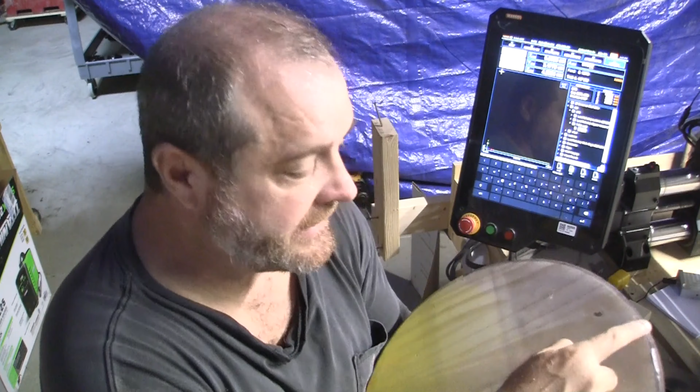Now, in order to do that, I needed to find the center of the back. Found this, transferred it around to this side, put a line, did the same thing on the other side, put a line, drew a line in the middle here, measured in 7.5 inches because I know these are 15, and then I put a square up here like this on each of these points, and then I drew a line.

So someplace in here I'm going to put this slot, someplace in this area here. I'm thinking right about here would be a good spot to start the slot. So this would be where the circle goes, and then we'll cut up like that and come back. And that should give me something I can just hang this on a wall.

Alright? Now, I have run a test on this already, but I don't feel real comfortable just throwing this down there and setting this up and going and cutting it. So what I want to do is I'm going to run another test, but I'm going to have this piece of wood again sitting like this on top of this. Let me talk about how the code actually works before we get busy with all this.

When I started working on CNC machines, we didn't have any software per se. We mainly used them to make simple, repeatable, mundane patterns, like boring a hole 2 inches deep and 1 inch in diameter by just cutting a bunch of circles. So we wrote code to do that. But this was something an operator could set in a piece of stock in a jig, and then hit a button and let it run, and it would run the same thing over and over and over again. And that was what we did.

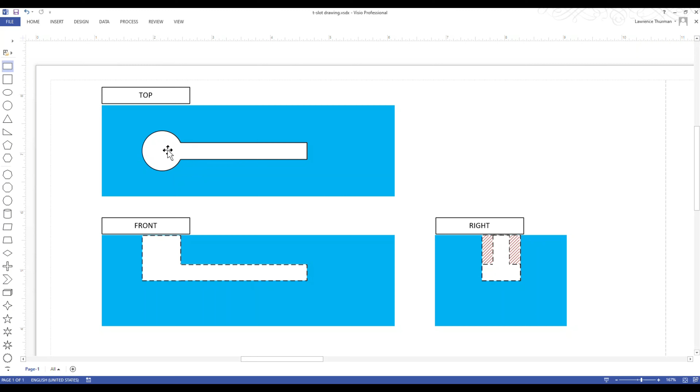So let's look at the work origins and the machine origin. So some things you've got to really think about, like this is all 2D here. Now the machine works in a 3D world, and so do you.

So you got to look at this as this being the X and Y, and this being the Z and X. Okay, you can't see the Y plane here, and you can't see the Z plane here. So the machine origin for me is down on the bottom left, right here. But if you look at the ZX plane, it is actually up above everything. That's where the Z is 0.

So this would be X, Y, and Z0, and this is X, Y, and Z0. It's all about the way you're looking at your machine. The work origin from the X and Y point in the XY plane looks like it's sitting right here. And these two look like they're in the same plane, but they're not.

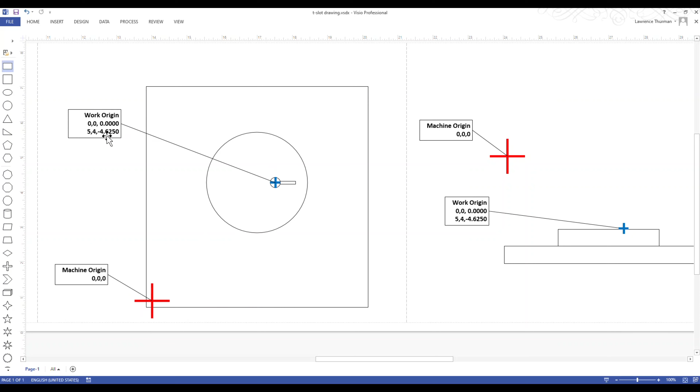This one is actually 5 inches this way and 4 inches back, and it's actually negative 4.625 down from this. But if you look in the XZ plane, you can see that this is down lower. And you can't see the Y, but you can see that the X is about 5 inches over. So this gives you a good reference.

When we set your bit down, you have to figure out where you want this crosshair to be. And when you do, you need to bring your bit right above it, don't touch it, and we'll need to probe. Okay? Now, we're not going to probe like you think. The only thing you're going to do is set the X and Y to 0 at that point in time. So your work origin up on your screen now says I'm at 0.

And then you're going to raise your bit up, put your probe block under there, and tap on Z. That's going to tell you how far down from here the Z is. This is not going to get stored anywhere. The Z will get stored in your G54, but your X and Y are not. You're just going to be basing that off the panel on the left-hand side of your screen. And this will make more sense when you actually see this happen on the Masso.

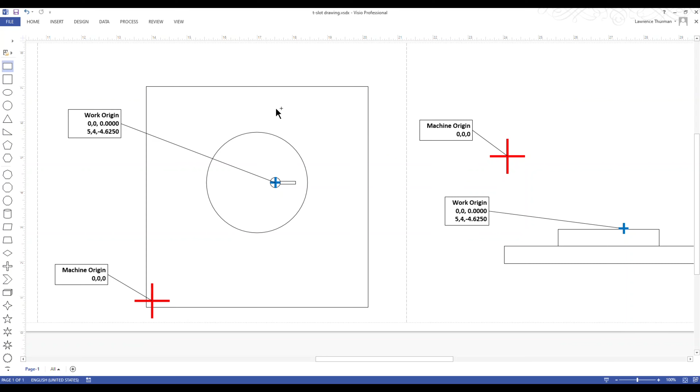But right now, we need to write some code. In order to write code, you need to have Notepad++ or Notepad or Word. It doesn't really matter. Word I wouldn't say unless you're going to save it as a text file. As long as you save it as an NC file, you should be fine. I'm going to name mine t-slot.nc when I save it.

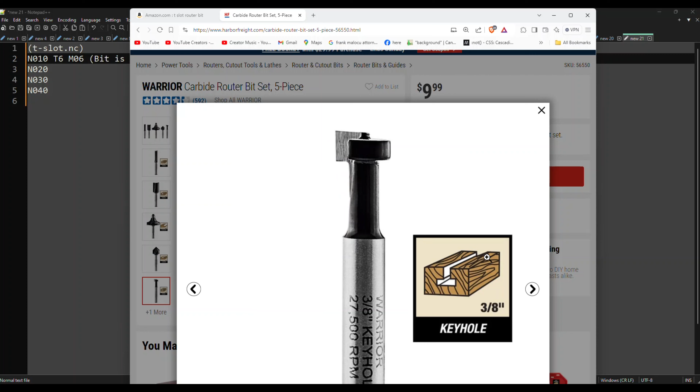picture of this, but from the tip of this to right about here, I don't know if you can see the L right there, but that there is the 3/8 of an inch down from there to here. And this is what cuts this top little piece out of the top here. So I don't know if there's a better picture I can find over here on Amazon. There is.

So if we look at this guy, you can see it right here. See how these have these L's on them? So from this point to this point, this high tip on mine is what 3/8 of an inch is. Okay? Just to let you know. So I wouldn't be worried about buying a really expensive bit for this, unless you're using this bit a lot. But for me, I'll probably use this bit maybe 6 or 7 times in my entire life. So I just got a cheap bit.

The next thing we need to do here is we need to tell it that we want to be on the XY plane. And then we need to tell it that we're going to use inches instead of metric, imperial. And then we're going to use G90, which is going to give us absolute mode. Now, this is where people start getting confused. What's the difference between absolute and relative? With that, we need to come back to this diagram.

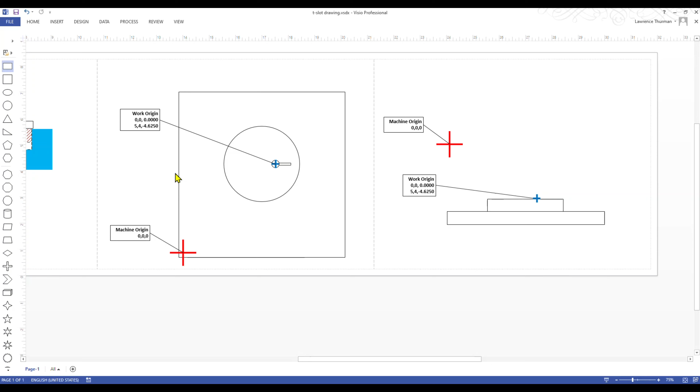So absolute means when I go in and we run code that says G00 X1.0, it's going to move from this point to 1 inch over here. It's not going to move 1 inch. It's going to move to X is equal to 1. Okay? Now I could have said make this relative and do X1, and then that would work.

But then coming back this way, it would have to say move to X minus 1, which would bring me back to here. Now in absolute mode, it would be X1 to here, and if I did X minus 1, it would end up over here, because that's the absolute position. So once we go to X1, we need to go back to X0.

So the first thing we need to do is we need to lower the bit. Now I'm going to use a G00, which is going to drop this bit as quickly as it can go. And we're going to drop down to 2.0. So 2 inches from the Z. Okay, because currently we're going to be sitting up over here.

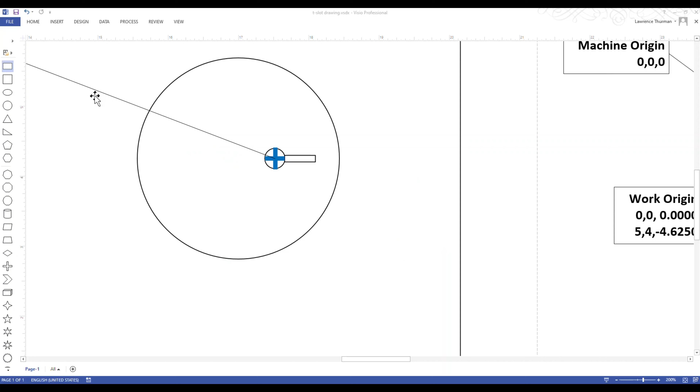It's going to be sitting up over here somewhere. And we're going to drop 2 inches above this, because now we're working in this work origin, remember. After that, we're going to move to G, and we're going to go X00, and then we're going to go to Y00.

And at that point, let's throw another 0 on here. We should not move anywhere. Nothing should happen with that line. And if we did everything right, then nothing will happen. So the next thing we want to do is we want to put an N70 in here. We want to go G00, and we're going to drop this down to just about touching the board. So 0.2 inches. It's a little under a 1/4 inch above the board.

And at this point in time is when I usually turn on my spindle. So here comes an M03, and we're going to set the spindle rate to 16,000. And when we get to that, the spindle will kick up. And at this point, we need to take the machine and we're going to drop down on a G01. It's going to be a linear movement. And we're going to drop till negative 0.375.

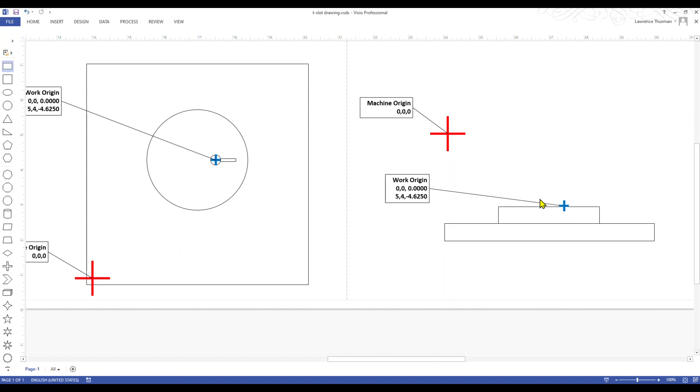Alright, now let's go back to the diagram here so we can kind of talk about this a little bit. So the bit was up here initially. We dropped down on line 50, 2 inches above. Then we went to X0, Y0, just in case this thing got bumped out of the way. And when we set our X0, Y0, we want to put it right back where we wanted it. Then we're going to drop down to 0.2, turn the spindle on, and then we're going to cut down in negative from this. Since this is our 0 for Z, it's going to cut down in negative.

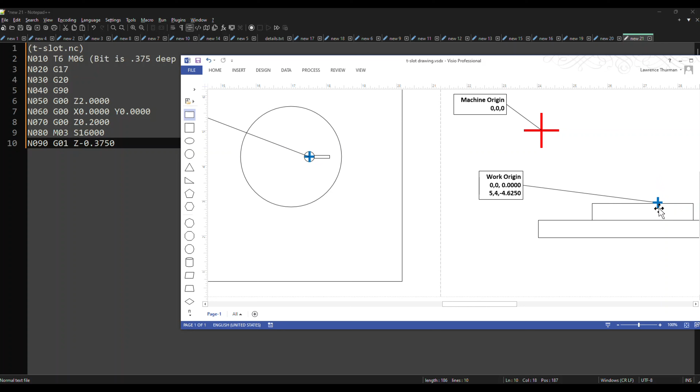And then we need to walk this way. And when we walk this way, we're going to go G01, and we're going to do X 1.0 at a feed rate of 30.0. So that's 30 inches per minute. Here we're going to put an 8.0 in there because I don't really want to bury that thing in there really quick. Alright, sorry I forgot that.

Then with the 110, we're going to move it back. So once it gets there, then we're going to move back to 0.00. And we don't need to put an F30 on that because once this is set with the speed, it's already initiated. I could change it. I could come back a lot quicker or slower, but there's no need to do anything like that.

Line 120, at that point in time, we're going to, as fast as we can, bring this back to 0.200. So we're just reversing what we did here. Now we're getting up to this level. And now that we're out, we're going to do a M05, which will turn the spindle off. And then line 140, we're going to do a G00, and we're going to take this to Z 2.0000. And then we're going to be back up at this spot right here. And at that point, we're going to tell the program, you're done. So that's an M02.

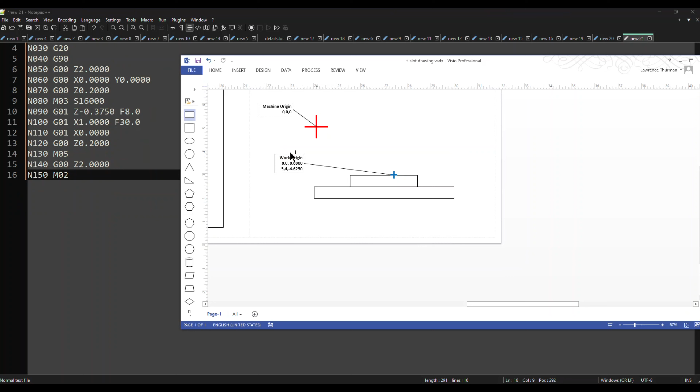And that's it. So we walk through this again, you're going to have the Z 2.0. You're going to be sitting up at this area here at 0. You're going to drop down to 2 inches. You're going to reassess where X and Y are. So it's going to make sure it's on 0. It's going to drop down again. It's going to turn the spindle on. It's going to drop down in here 3/8 of an inch, and then we're going to move at a feed rate of 8 inches per minute.

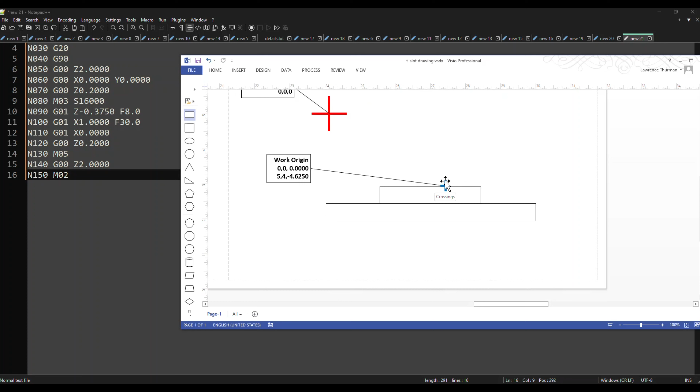Then we're going to move at 30 inches per minute to where X is equal to 1, which is out here. Then we're going to move 30 inches per minute, X is equal to 0. We're going to come right back where we were. Then we're going to raise up to 0.2 above, turn the spindle off, and then we're going to raise up to 2 inches. End of program. And that is what this is going to do.

And we just need to save this as something like T-slot.NC. And that's it. If you save this with text, you probably want to make this all types. And then just save it as NC. And when you save it, it'll be NC. It won't be NC.txt. Okay? So there's nothing more to do to this except put it on a jump drive and take it out to the shop.

So let's take a run out there. Now that you see the code and you've seen how it works, I'm going to load this file up. It's called T-slot-NC, and there's the magic line. There's the magic file. Now this is what throws a lot of people off whenever you do something like a T-slot, because they don't see the hole, they don't see the path, they don't see it in three-dimensional like you would inside of a piece of software. But I assure you it is here.

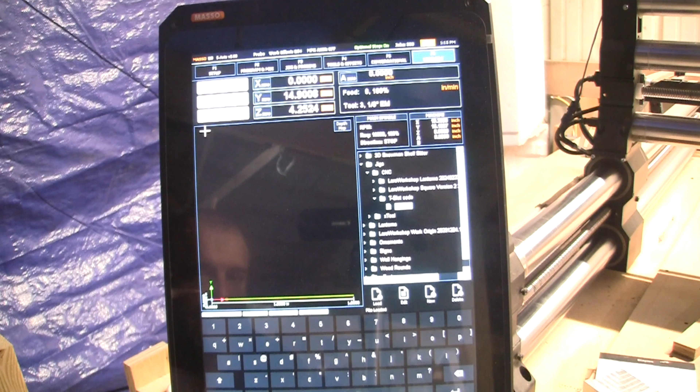So when you're doing something like this, in order to probe it exactly where you want to start this bit, which is for me right up here, I just got to get this over a little bit. And I'm thinking right about there will work. And that looks like we're good. Now, at that point is where you need to come back to your code over here. You come back to the Masso and you need to zero this out, X and Y. Alright?

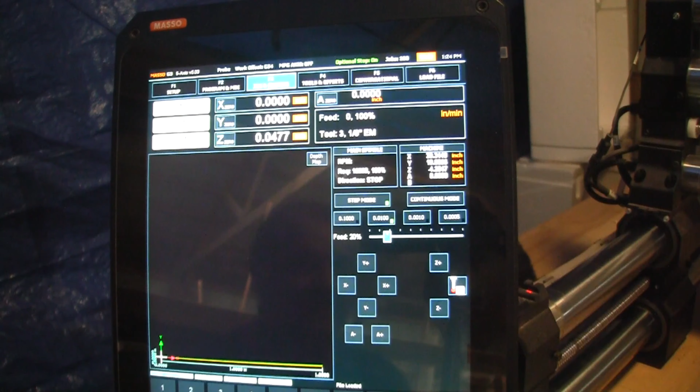And now we need to test for the Z. We need to bring this up, continuous mode, and we need to test the height of this. So it's easy as just probing with this bit. Alright, now if we take this and we bring the Z down to right there, that is Z at 0, and we're sitting right, just barely touching that board. And that'll be good enough for what I'm doing.

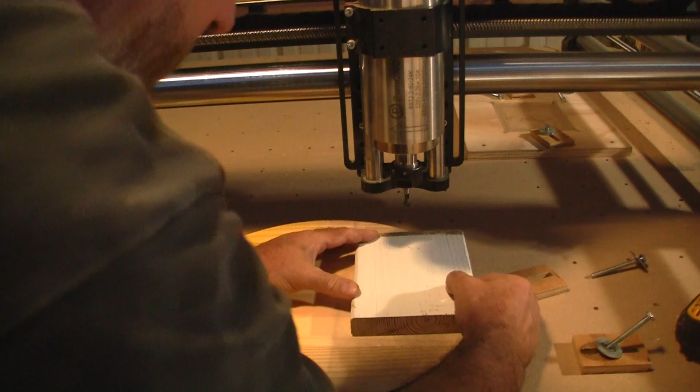Now, I want to test this out before I do anything. So I'm going to raise the Z up, and I'm going to hit go to work origin, which should be perfect. And now I'm going to lay this down on here. And with respect to this, we're going to put it right up at the very tip of this, like that, and like that. And we're going to see if this is going to do exactly what I want it to do. If it doesn't, then we need to try this again. In order for me to do this, I've got to zero out on this top piece here.

Now, what this guy should do, I'm going to hit work origin, should come straight up. We're going to go up 2 inches. It's going to tell it to go to 0, 0. It better stay where it's at. Then we're going to come down, we're going to get 2 inches above this. Then we're going to start the motor, and then we're going to drop down 3/8 of an inch. And then we're going to go 1 inch this way, and then we're going to come back to 0, and then we're going to come out. And I'm just going to hold this with my hand once I kick this off. Let's see what happens.